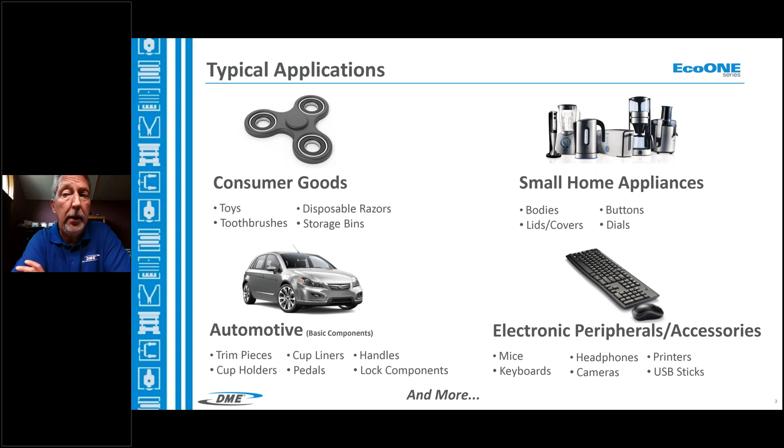Kind of as I noted, typical applications are real straightforward consumer goods, toys, home appliances, and so forth, as shown on the screen. Again, we're talking commodity resins, not highly technical parts, and certainly parts that don't require exotic gating. Really straightforward applications.

Again, it's a value-driven market, and it's growing, and it is extremely cost sensitive, which was our number one priority. High technology or advanced technology is not necessary in all applications. And also, time to deliver is critically important. A lot of these projects need to move at very, very fast paces, and mold makers can't be waiting 6, 8, 10 weeks for a hot runner system. So with EcoONE, along with the price, our lead time at present is 3 to 4 weeks to deliver, and that's anywhere globally.

We do anticipate that is going to continue to be reduced as we get a little bit further along with the product. So again, to serve this part of the market, EcoONE is our system. It's a standardized modular system, meaning that the nozzle assemblies come in various pieces. We'll get into that detail a little bit later. But the modular system is what allows us to keep inventory of all of the components. It is a configurable 1, 2, 4, 8, or 16 drop system at present.

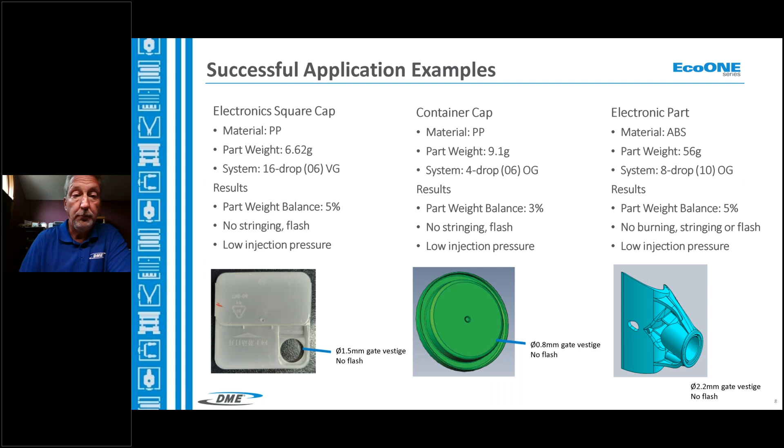There's some more information there. Rapid delivery. We're going to get into service shortly. Service is established for quick delivery of replacement parts anywhere in the world. Global regional inventory of components to make system service easy and inexpensive.

Lead time again, and also with each EcoONE system, we will provide CAD not only of the nozzle and cutout data, but also additional support when it comes to hot half plate design and manufacturing.

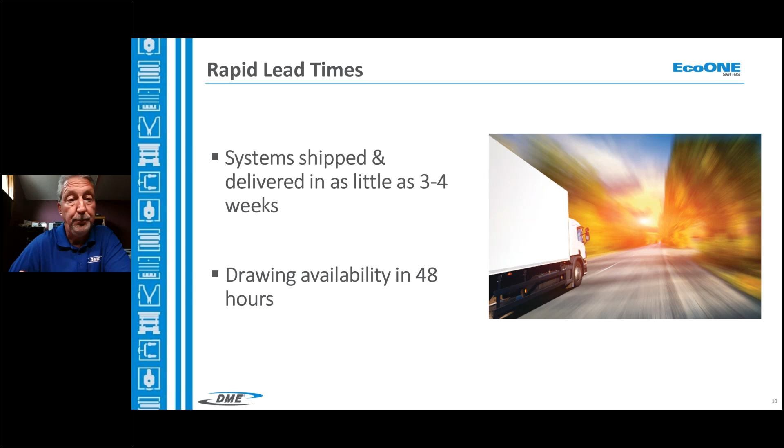EcoONE is available in 6 different nozzle runner sizes: 4, 6, 8, 10, 12, 16 millimeter. Quite an availability on different nozzle lengths. We do believe that we're offering a portfolio a little bit broader than some of the lower cost competition.

Flange-based design. It's a compression system. There are no screw-in nozzles. They're compression only. And EcoONE is available in the thermal gate or a valve gate configuration. Valve gate sizes start at 6 millimeter, 8, 10, 12, and 16. There's currently not a 4 millimeter valve gate available in EcoONE.

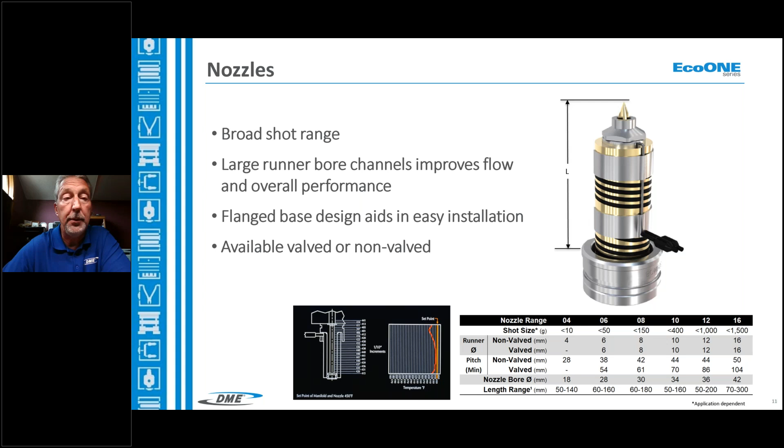Again, as I touched on, the nozzle assembly is really one of the keys to the competitiveness of the system. Modular being, each family size head is the same. Nozzle bodies change, of course, with length, as do the nozzle heaters. The gate seals for each of the families are all the same and thread into the same nozzle body.

So you can go from a sprue tip to feed a runner, or you can go to a point or a torpedo type gate, same nozzle body, same nozzle heater, etc. And again, this is what allows us to maintain modest inventory levels, not only components for new systems, but replacement parts, and get them delivered to the customer quickly.

The EcoONE nozzle is a front load type of assembly. So the nozzle head, nozzle body comes in from the back side or manifold side of the retainer plate. Heaters, thermocouples, and gate seals are front loaded from the opposite side of the plate, and that's also how maintenance would typically be performed. And again, the hot runner could still be hanging in the press to perform that type of heater or thermocouple replacement maintenance, as long as you can get to the cavity plate.

Gate options are the same for both thermal and valve gated systems. Again, we've got standard sprue tip. Also, we have extra stock sprue tips or extended length sprue tips for customer machining to make runners. In our thermal gate, what we call our point gates or torpedoes are available in a full body or bodiless configuration.

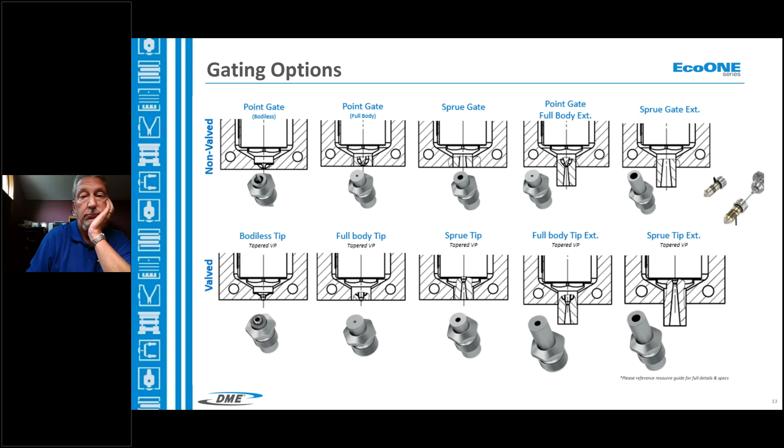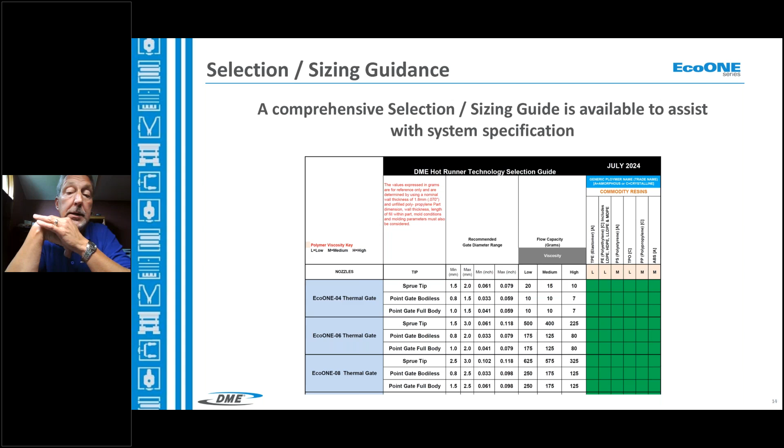Again, being configurable to application, we provide a very simple to follow application guide, which basically lists the different allowable resins, their general viscosity, part sizes to help select the size of the nozzle runners for each one of the applications. Very easy to follow along with, and certainly we will provide guidance as quote requests come in.

So we ask the customers to do their best to fill out what they think they need. And again, back through application review, everything will be looked at. If anything needs to be questioned and answered, that will be done by DME technical personnel.

The manifold design. So along with our modular nozzle assembly, the other key to economy with EcoONE is the standardization of manifold geometry. So in other words, the shapes of the available manifolds for EcoONE are set, although the pitch or the location of the nozzle drops from the inlet and from each other can be customer selectable.

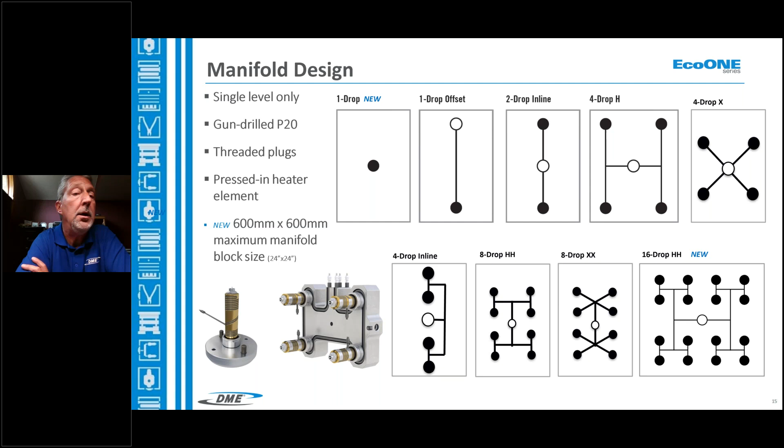They are single level manifolds only, gun drilled, threaded plug style for the flow channels, press-in heater element at present, which are easily serviced in the field by replacement flexible heaters. And we do have a maximum size on the manifold block itself, which is 600 by 600. If anyone saw the initial offering, it was originally 254 by 254, which we've increased, as well as adding the 16 drop.

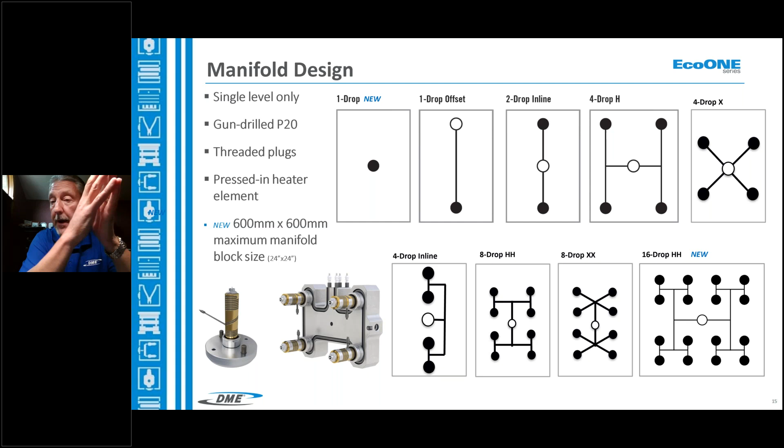Again, back to the cost, the engineering and the manufacturing of the EcoONE manifolds is highly automated, which is a cost reduction which we're trying to pass on to our customers, the tool makers, to give them a competitive edge when they're quoting complete mold packages.

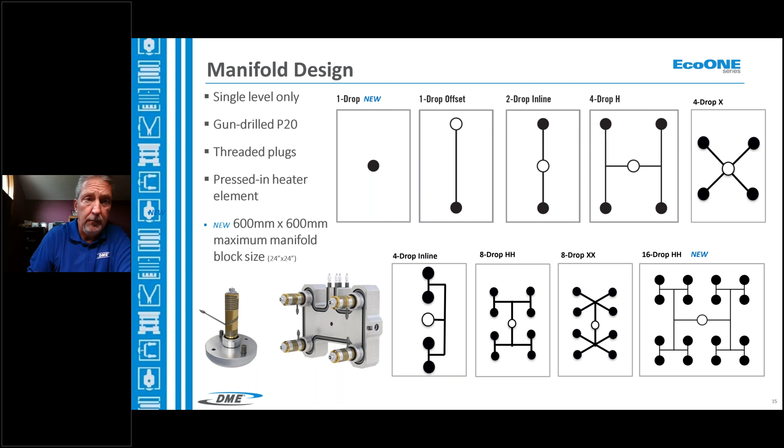We have introduced a single heater. In DME language, we would call this a hot sprue bushing, or a single heater, single nozzle product, which we would call a hot sprue bushing.

Uses the exact same multi-drop nozzle heaters, thermocouples, gate seals. This could be used for production or also for prototyping before taking a system to multi-drop. And we needed to make sure that the gate seals across the family were all the same, so there were no issues moving from a prototype to a production tool. And these are also priced very, very competitively, again, to keep the cost of that tool development down.

Included with the EcoONE system is the electrical box, the DME standard 12-zone configuration, PIC 12G, MTC 12G with the pre-assembled and wired box is the standard configuration. Although if that doesn't fit with what your standard interconnect is, we have other options available, such as the HBE-24 double latch that's very, very prominent in our industry as well.

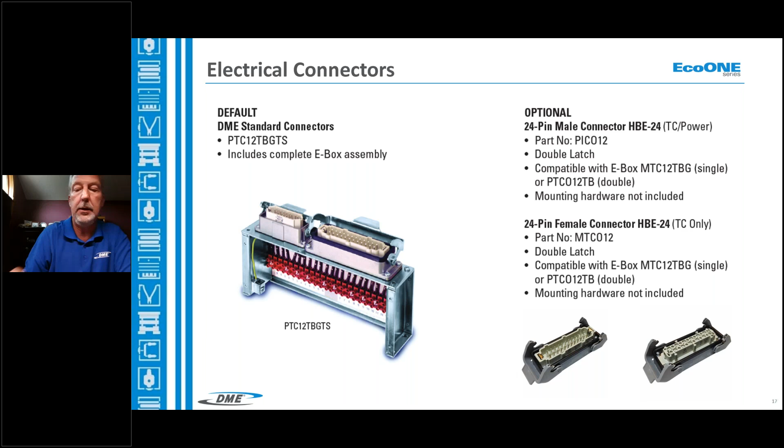Warranty and service, very, very important. As noted here on the slide, we've got two-year warranties on the nozzle and manifold heater elements, 1-year warranty on the non-wear components, and 60 days on the wear components such as gate seals.

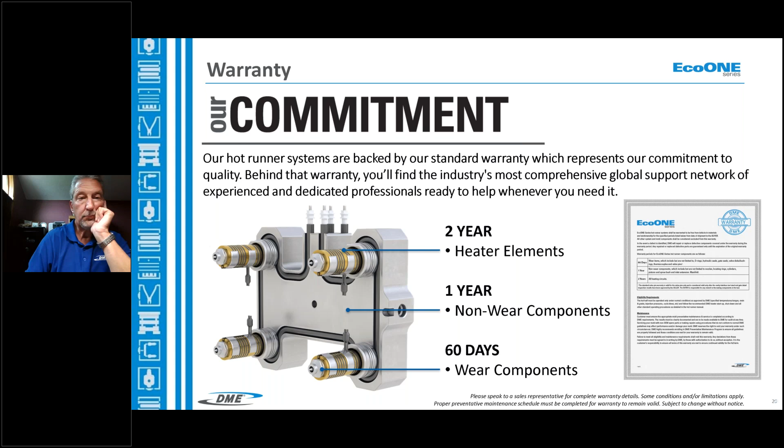And quickly closing off the EcoONE family, our ME series of integrated or all-in-one temperature controllers were developed specifically for the low-end economical system. Still full-featured, touchscreen user interface, pretty decent complement of event recording, simple communications with the injection molding machine, integrated output cards, things of that nature, available in either a 6-zone or a 12-zone configuration.

And they are, as you can see in the picture there, easily stackable, although the power inputs are not combined. So you would have to run separate cords to a stackable configuration. And these do come standard with the standard DME thermocouple and output connectors.

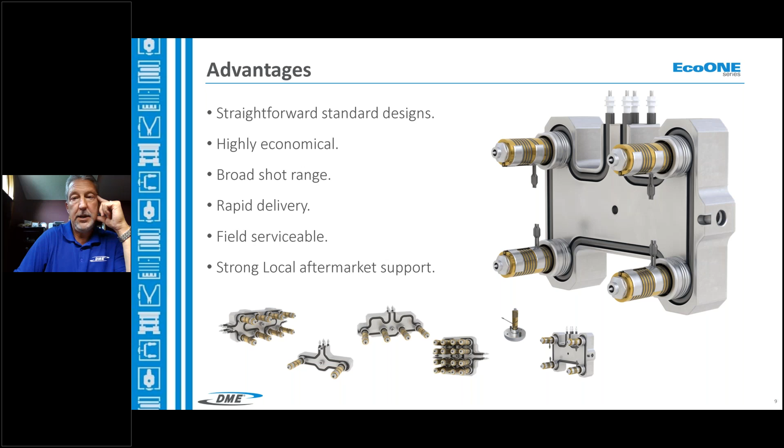And that's the end of the presentation. And I kind of went through that much quicker than I anticipated. My apologies for that. So at this time, if there's any questions, Marc or Mike, maybe we can address those questions. Yeah, I think there's a couple questions. Hold on, let me get to them real quickly.

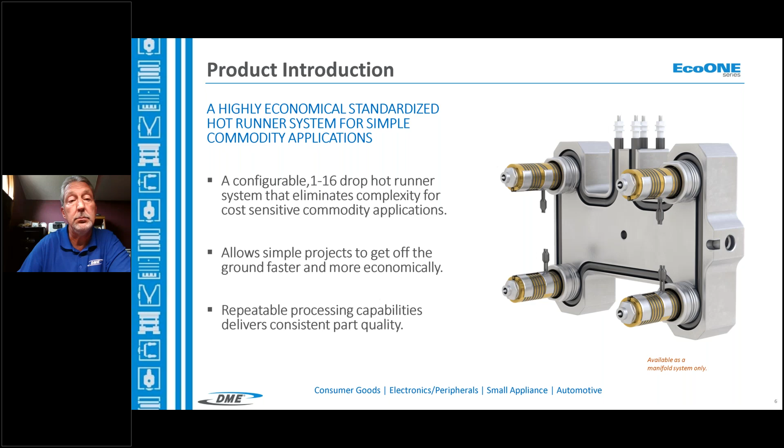Okay. Another question, do you provide mold flow to help with design services? Well, we most certainly have mold flow available. Again, EcoONE is designed to be really a customer configurable system using the simple design aids with DME application engineer review and comment.

If application engineering feels that the application or the project really requires mold flow analysis, to check gating and balance of things of that nature, we could look at offering mold flow as an add-on to EcoONE, or again, depending on the complexity of the application, we may have to move away from EcoONE into a fully engineered system, which at present DME offers Stellar One, which is also very similar nozzle technology as EcoONE. So it is available, but it's not a part of the standard EcoONE package. Okay.

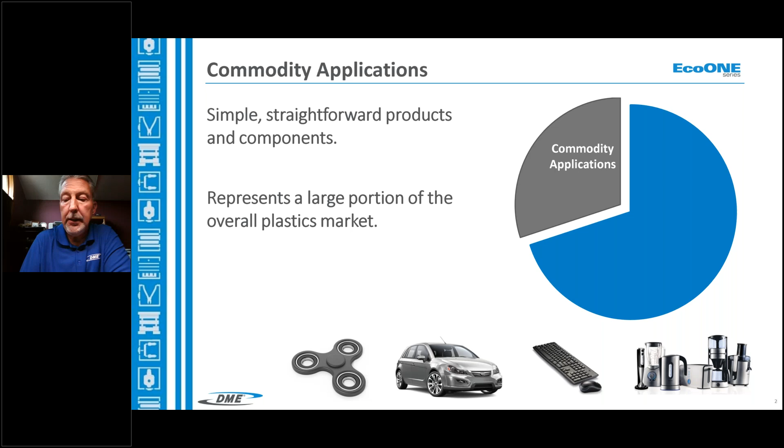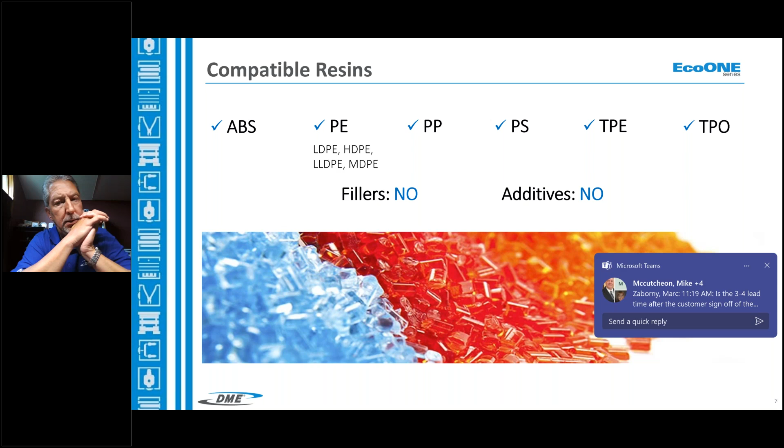I think you may have went over this in one of the slides, but we could review it real quick. Are the only resins allowed for EcoONE listed in the presentation? And actually, thank you, Mike. That is a good question, whoever that's from. We have just expanded the resin options, and we've picked up nylon, polycarbonate, POM, I believe we've added. Forgive me for not having that at my fingertips.

Although those resins must be scrutinized more intensely by application engineering. System's been tested on actually a much wider variety of resins than what we're allowing at this phase of this product. But yes, there is the possibility of bringing in some engineered materials, as well as up to 15% glass filled materials, again with much higher application engineer review and scrutiny.

So yes, there are other possibilities, so please feel free to make your requests, and everything will be looked at, and you'll be gotten back to very quickly with different options. Okay. Going back to the lead time, is the 3 to 4 week lead time after customer sign-off on drop locations? Yes, very good. Yes, absolutely. I may have been a little vague on that.

We need quote acceptance, purchase order. Within 24 hours of that, the system models will be delivered to the customer for verification and written approval. So from that point, that should be no more than a 48-hour process, as long as the customer has the time to respond quickly. And then that's when the 3 to 4 weeks kicks in. Okay. So then I think you answered a question there.

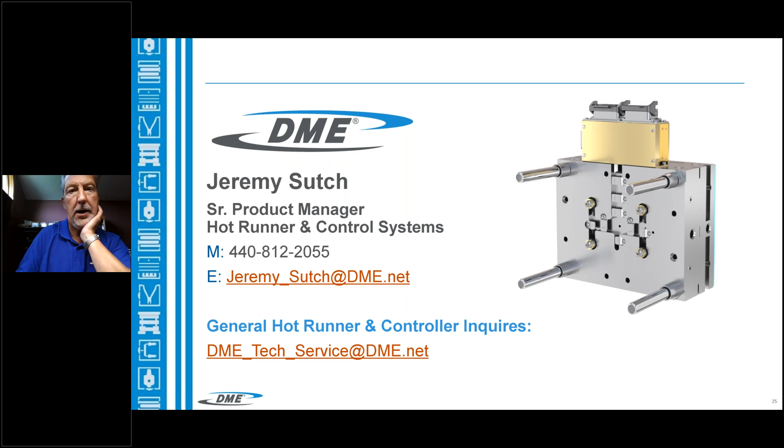And how is the nozzle retained? Does it use a retaining ring? How is the tip or the gate seal retained? I think that would be a question about the tip. Basically the nozzle body is threaded - you can't really see it, but there's a female thread on the nozzle body and a male thread on the mating gate seal, tip, or retainer, and it just threads together. There is no snap ring.

The hex flange on the tips or retainers also serves to hold the nozzle heater in place on the body. There are no additional retention mechanisms to hold the nozzle heater in place - it's just a sleeve, a brass sleeve, very high quality. Even though we're saying economy here, and many of us in the business know that when some of these low cost Asian systems make it into our Western markets, the quality of the components is quite poor.

It's just as cheap as possible to get them to the customers, run the mold for a year or whatever, and throw it away. Our intention here is the exact opposite - we want to deliver very high quality nozzle components, what you would expect of DME, components you should not have to worry about for years, for the service life of the particular mold.

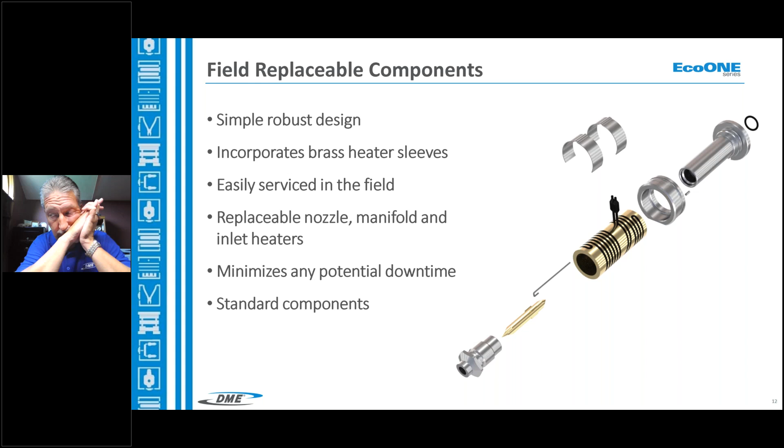It's very, very good. So it sounds as if the system is really designed for not only prototyping but also long-term production use, with the low entry point to get some prototype material out there, maybe on a smaller cavity tool, and then go ahead and implement it on a larger production tool as well. Absolutely, and there's no reason whatsoever these tools shouldn't last a decade or more - maybe some normal maintenance, if you're using torpedo type gate seals you might have to replace needles, maybe a heater here or there, but you should get many years out of this system if properly maintained. Great - it's not a throwaway.